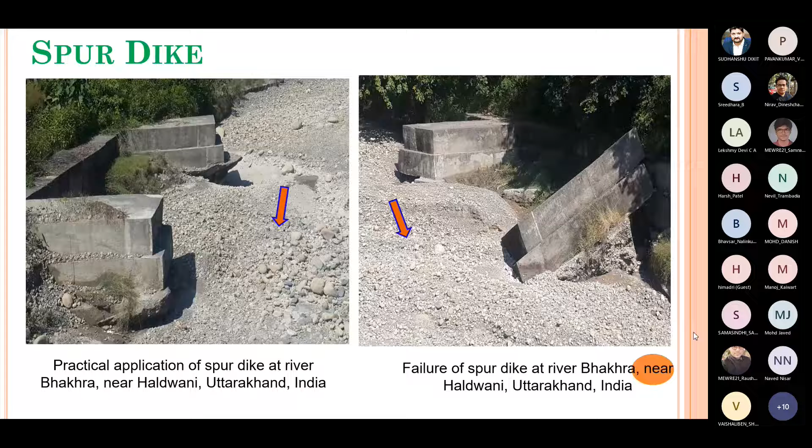Now come to the types of spur dykes. There are many types according to permeability, according to submergence, according to inclination, and some special types also used. According to permeability, there are two types: first, impermeable spur dyke, and second, permeable spur dyke.

Impermeable spur dykes are installed at the end, at the river bank. It can be built of local soil, stones, gravel, rocks, or gabions, and used to divert the flow away from the bank. But permeable spur dykes can be made from timber, bamboo, steel, or reinforced concrete piles, and allow water to pass through them at reduced velocity.

Similarly, according to submergence, there are two types of spur dykes: submerged and non-submerged. When water flows over the spur dyke, meaning the spur dyke is fully submerged in water, it is known as a submerged spur dyke. But when spur dykes are not fully submerged in water, or where water passes through any length of the spur dyke, they are known as non-submerged spur dykes.

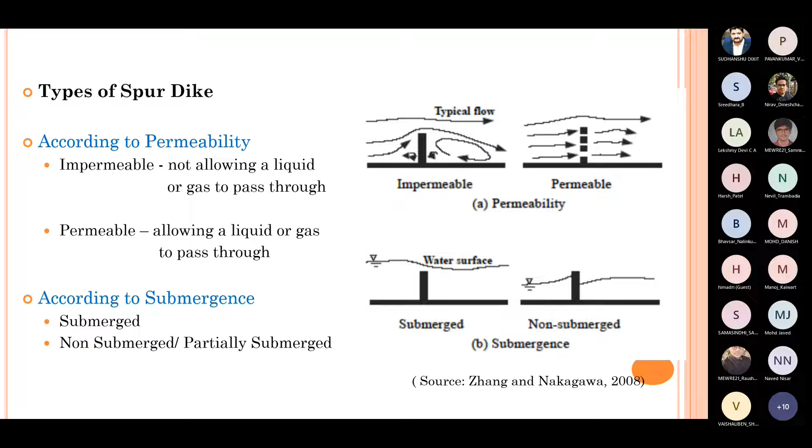According to inclination, there are three types of spur dykes: attracting, deflecting, and repelling. Attracting spur dykes point downward and attract the flow towards its head and thus to the bank. Deflecting spur dykes are simply perpendicular to the flow and divert the flow away from the bank. But repelling spur dykes incline in the upstream direction and divert the flow away from itself, so that during a flood the flow is diverted toward the middle of the river.

And according to its appearance, meaning the shape of the head of the spur dyke, there are some types: straight spur dyke, this is also an example of deflecting, mole head spur dyke, L head, T head, and hockey stick.

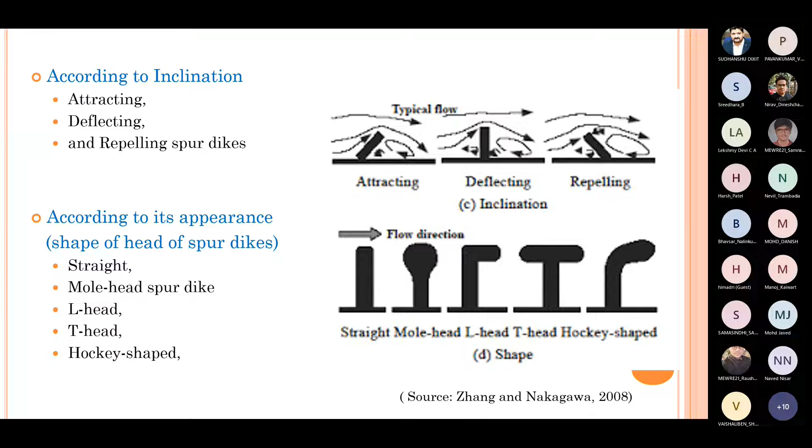Now we discuss typical flow around the abutment. Flow past the abutment is divided into three zones: main flow zone, mixing zone, and wake flow zone.

The wake flow zone is also divided into the return flow zone and reattachment zone. The main flow zone extends from the head of the abutment to the opposite side of the channel. In the main flow zone, the velocity is accelerated to near about 1.5 times the approaching flow velocity.

The mixing zone is between the main flow zone and the wake zone. The return flow zone is subdivided, and there are many small and large eddies developed within the wake flow zone. In the reattachment zone, water is reattached after the separation into the downstream of the channel.

Similarly, we have to discuss the typical flow field in a scour hole. Suppose there is an abutment at the bank of the river; water coming from upstream to downstream strikes the abutment. Some bow waves are formed, and after the strike, water goes downward.

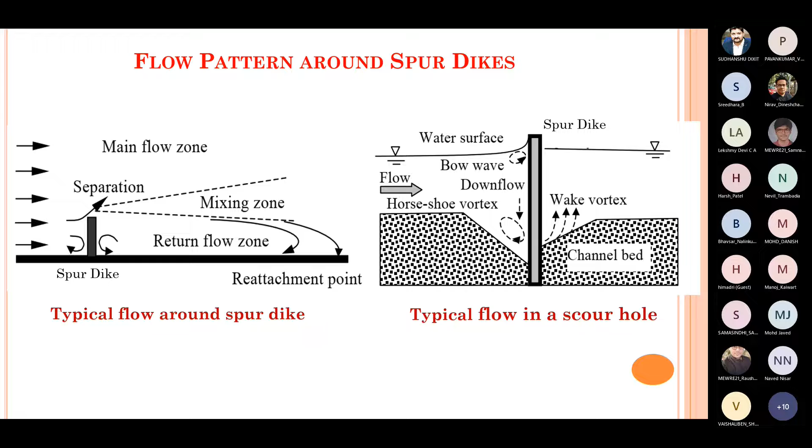Then, some turbulence characteristics of the flow will be discussed in this presentation.

We will look at what characteristics have been found and how to interpret them for analysis purposes. As shown earlier, around the abutment there is three-dimensional turbulent flow. The development of scour around the abutment is due to this type of three-dimensional flow.

Water moves in the longitudinal, transverse, and vertical directions. These complex phenomena that form the scour are poorly understood and difficult to characterize. The major turbulence characteristics are mean velocities in the longitudinal, transverse, and vertical directions.

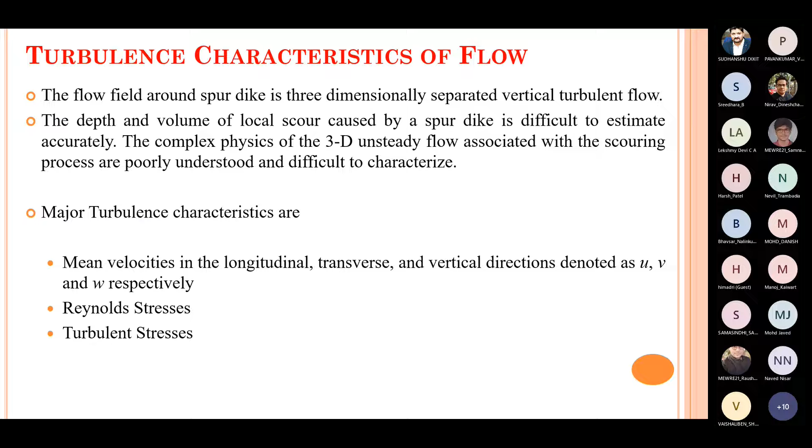We denote these as U, V, and W. Also important are the Reynolds stresses and turbulent stresses.

These are some instruments used for measurement of three-dimensional flow velocity. First, acoustic Doppler velocimetry, known as ADV. It is designed to record instantaneous velocity components at a single point with high frequency. ADV is capable of recording at near about 200 hertz frequency.

I have used a Vectrino Plus instrument that is capable of recording velocity at 200 hertz. The measurements are performed by measuring the velocity of particles in a remote sampling volume, based upon the Doppler shift effect.

The second instrument is particle tracking velocimetry, PTV. PTV is a velocimetry method or technique to measure velocity and trajectories of moving objects in fluid mechanics. These objects are neutrally buoyant particles suspended in the fluid flow.

Another instrument is particle image velocimetry, PIV, which measures the velocity of fluid as it passes an observation point that is fixed in space.

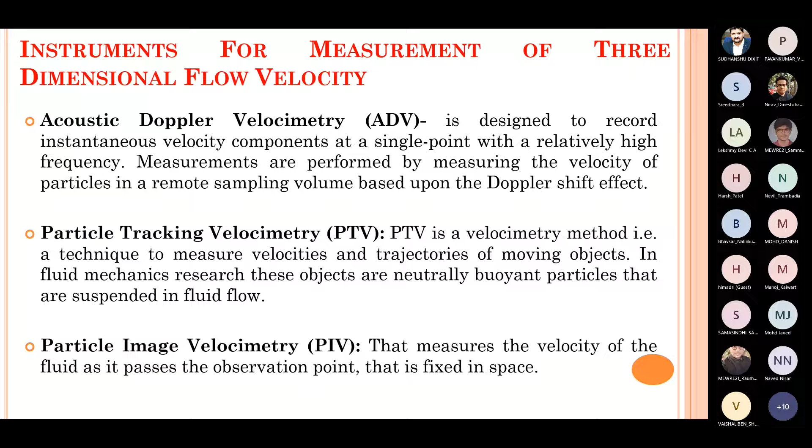So in this presentation, we have to know in detail about ADV, the Vectrino Plus instrument. The first instrument is Sontek Argonaut ADV, and the second is Vectrino Plus Micro ADV, which I have used.

The Vectrino Plus Micro ADV is a 16 megahertz instrument. This instrument measures the velocity from the transmitted transducer at 5 centimeters below the transducer, with a sampling volume of near about 9 mm.

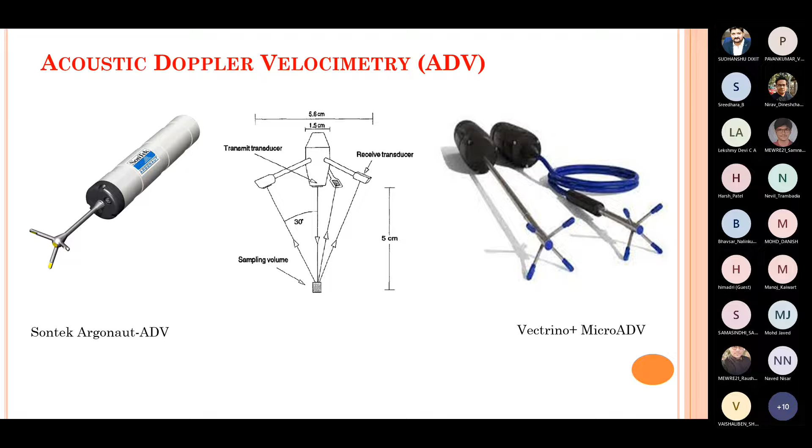Features of the 16 megahertz Micro ADV: this is a 3-axis velocity measurement sensor mounted on a 25 centimeter stem, with a high sampling rate up to 50 hertz, and a small sampling volume less than 0.1 cubic centimeter.

It has a large velocity range of 1 millimeter per second to 2.5 meters per second, excellent low flow performance, and no recalibration needed. It includes comprehensive software including Horizon ADV, with proven Sontek reliability.

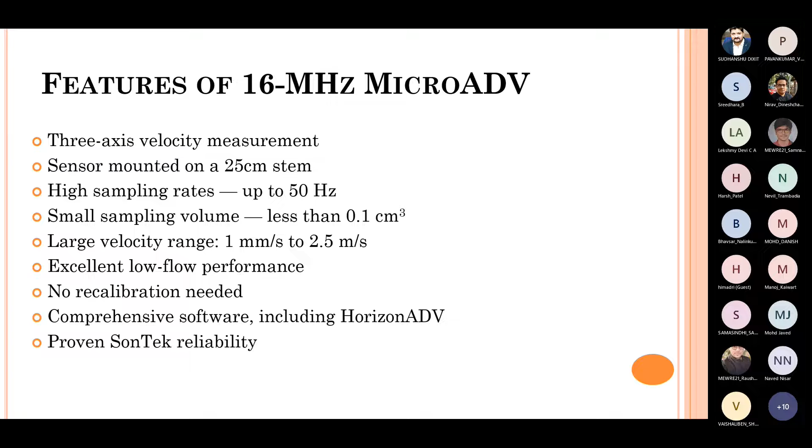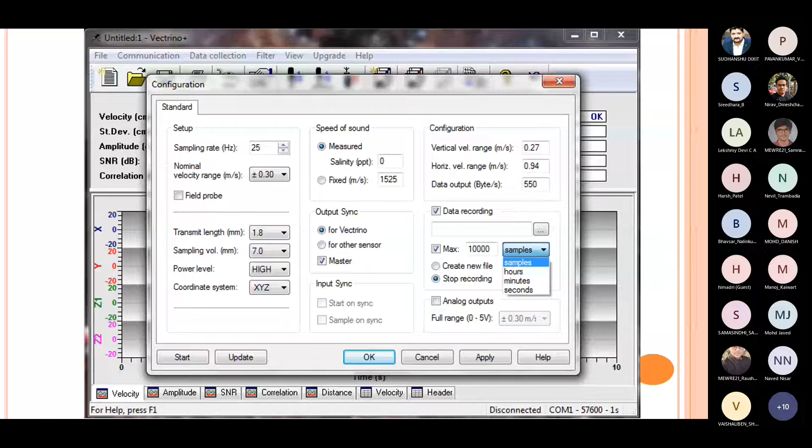After clicking OK, this is the view of the recording data: velocity, standard deviation, amplitude, SNR - SNR nearly more than 14 I think for good observation - and correlation percentage greater than 70. Then sample number and time, sample number, temperature, distance in centimeter.

Here is how you have taken readings for the experiment, at what distance you want to take the reading. This is distance in centimeter. Then status is okay. This is all about it.

This one shows the Vectrino plus a downward blue arrow - this is for directly, if you click on this, then start the run. If you want to check and set the distance, you click on the center one, Vectrino plus sign and downward blue arrow and near surface, so you check the distance, how much above or below you have to set your probe. Then upward red arrow is to stop the run.

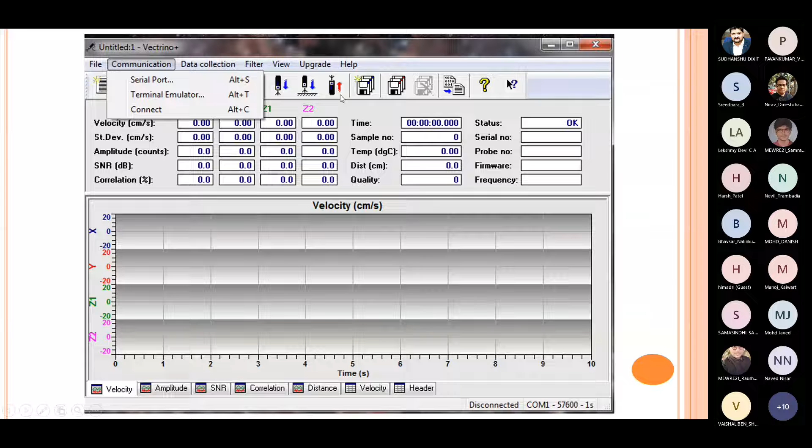This study presents the result of flow and turbulence characteristics measured by down-looking 16 MHz Vectrino plus micro ADV around partially submerged spur dike founded in clay gravel mixture. Velocity and turbulence data was collected at various cross-sections at wake and upstream of the spur dike, within and outside of the scour hole. The longitudinal velocity, turbulence intensity and stresses were measured and quantitative analysis was carried out.

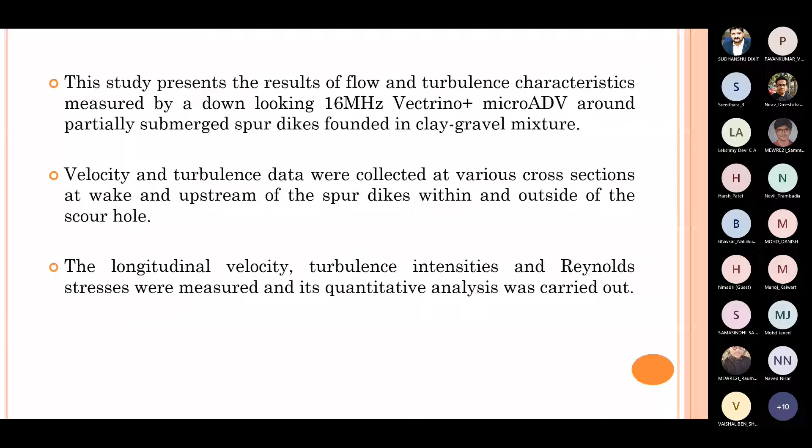So some brief review of literature about ADV. Sukhodolov in 2004 conducted a case study on turbulent flow and sediment distribution in groyne field. He used ADV at a sampling rate of 25 Hz for 100 to 300 seconds, and also used ExploreV 1.5 software developed by Nortec for processing the measured instantaneous velocities.

Similarly, Kuhnle 2008 measured and simulated flow near a submerged dike. He also used ADV, but frequency was 50 Hertz for 5-minute duration. Duan 2009 studied mean flow and turbulence around experimental spur dike, using micro ADV at sampling rate of 25 Hertz.

He measured about 1500 instantaneous velocities at each node. Then Ghodsian and Vaghefi did an experimental study on scour and flow field in scour hole around T-shaped spur dike in 90-degree bend. He used ADV Vectrino at a sampling rate of 50 Hertz for a period of 1 to 3 minutes.

Then Yaeger 2009 studied mean flow and turbulence around two series of experimental dikes. He used 16 MHz Sontek micro-ADV at a sampling rate of 25 Hertz, and used WinADV software from Sontek for post processing of data.

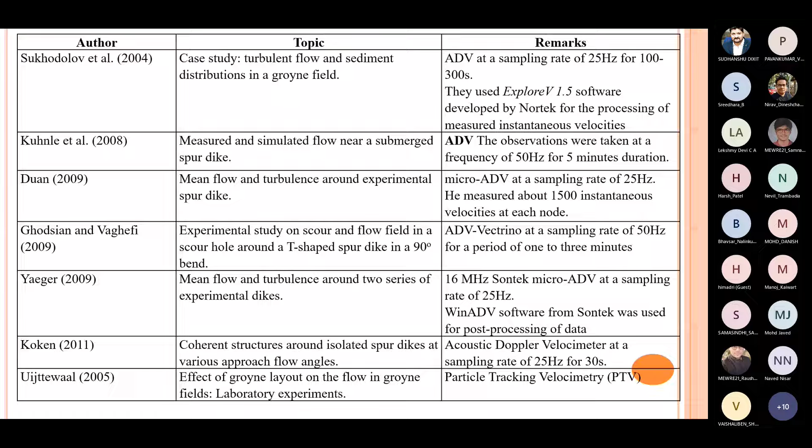So this slide shows the authors' works on ADV and how much time they recorded data at a particular node, at what frequency.

Then my experimental setup and procedure. The extensive experimental work for the present study is carried out in the Hydraulics Engineering Laboratory of Civil Engineering Department, IIT Roorkee. I have used clay, sand, and gravel - this is a photograph view of sediment used in the experiment.

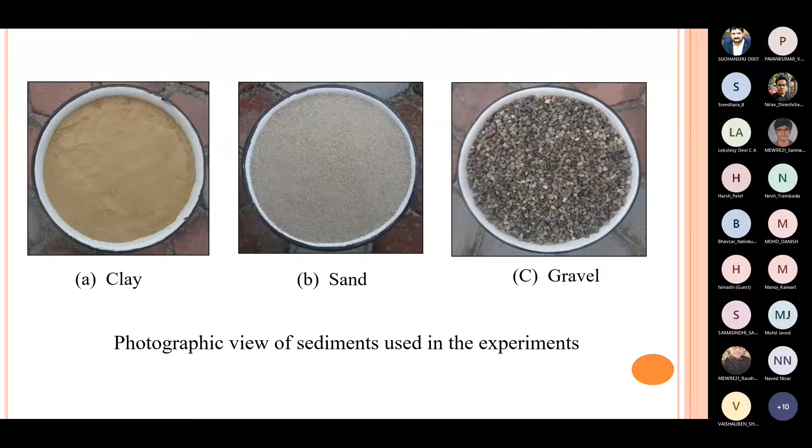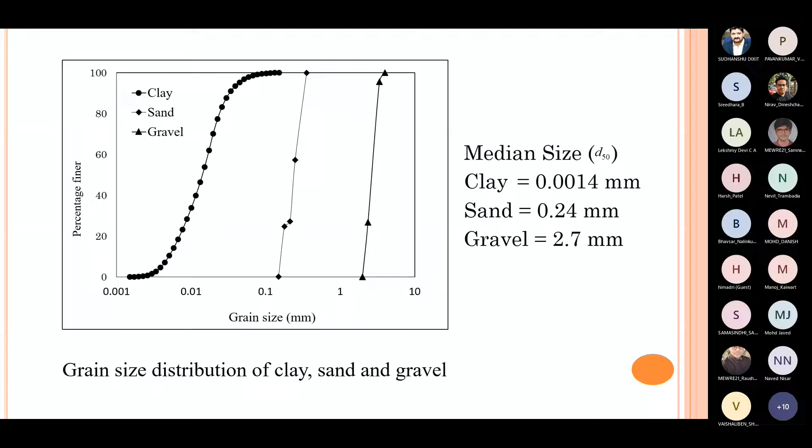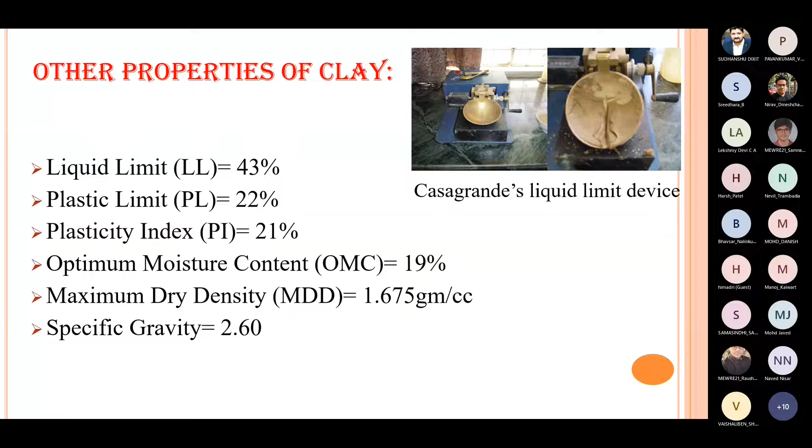The median size of clay is 0.0014 mm, sand 0.24 mm, and gravel 2.7 mm was used in the experiment. Other properties of clay were: liquid limit 43%, plastic limit 22%, plasticity index 21%, OMC 19%, maximum dry density 1.675 gram per cubic centimeter, and specific gravity about 2.60.

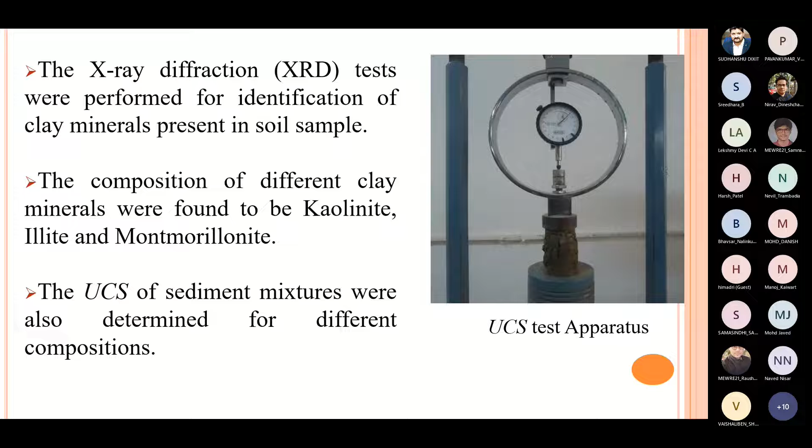Three types of spur dikes were used in the experiment, with transverse lengths of 6.1 centimeters, 8.9 centimeters, and 11.52 centimeters.

Ten types of sediment mixture were used, all taken by weight: 10% clay and 90% gravel, 20% clay, mixtures of clay and gravel, and mixtures of clay, sand, and gravel. Sand and gravel were taken in equal proportion, and clay was varied from 10 to 50%.

Flow characteristics were carried out at around 11.52 centimeters spur dike on a 30% clay and 70% gravel sediment mixture bed.

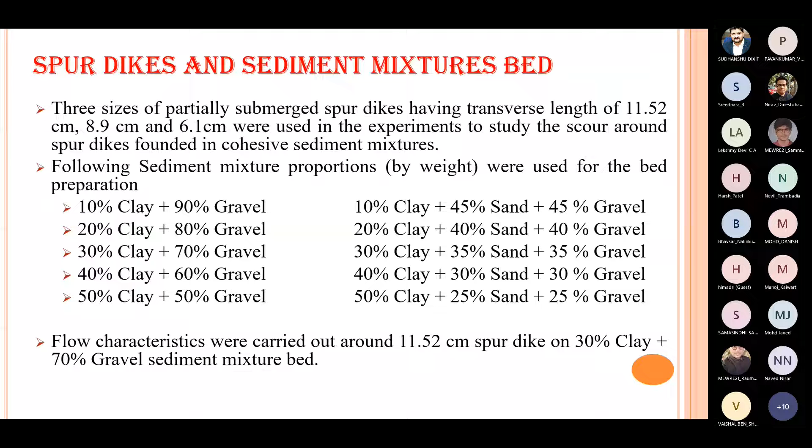This is the photographic view of the flume established in the Hydraulic Engineering Department, IIT Roorkee. The total length of the flume was 25 meters, width was 1 meter, depth was 0.3 meter, and the slope of the flume was 0.003. The working section where the spur dike was installed had a length of 4 meters, width 1 meter, depth 0.6 meter, and bed thickness of 0.3 meter. So the normal depth of the flume was 0.3 meter, and the working section beyond this was 30 centimeters deeper, totaling 0.6 meter.

For flow velocity and discharge measurement: flow velocity was measured by a pitot tube 1 meter before the spur dike, and a sharp-crested weir, installed at the end of the flume, was used for discharge measurement.

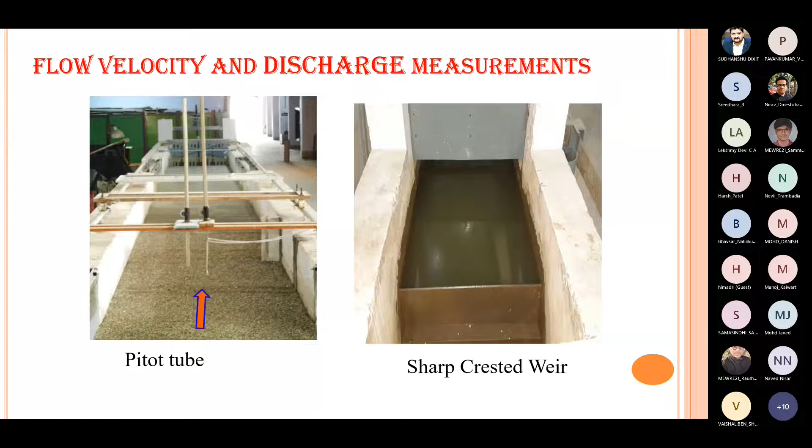This is the procedure for bed preparation: mixing of sediment and compaction. First, equally weighted mixture, meaning 10% clay and 90% gravel, or any other proportion, was taken. We mixed the clay and gravel thoroughly, then added water into the mixture and left it for 24 hours. Due to this, the moisture content is homogenized within the whole mixture.

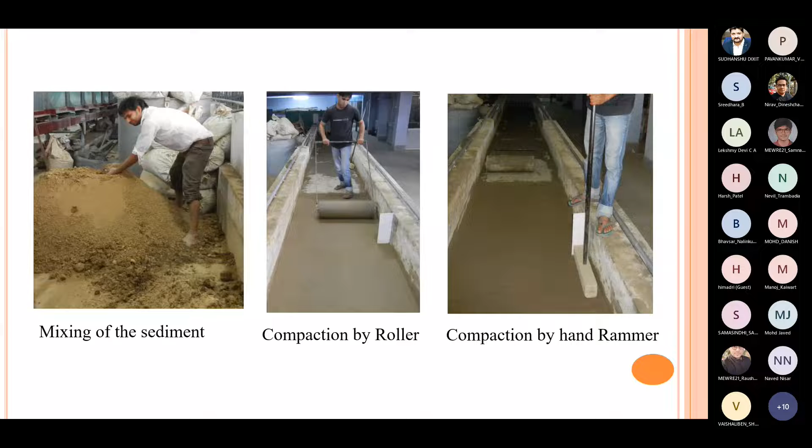After preparation of the sediment mixture, the test section was filled with the prepared mixture after installation of the spur dike at a predetermined location in the groove of the test section. The test section started at 12 meters downstream of the flume entrance, and the spur dike with transverse length of 11.52 centimeters was installed at 14 meters downstream of the flume entrance.

The filled sediment mixture was compacted in 3 layers of approximately 10 centimeter thickness by dynamic compaction method, achieved with the help of a cylindrical roller. The area near the sides of the channel and the spur dike was compacted using a wooden hand hammer with dimensions of 40 centimeter length, 10 centimeter width, and 7 centimeter thickness, to provide bonding between layers. Each layer was near 10 centimeters.

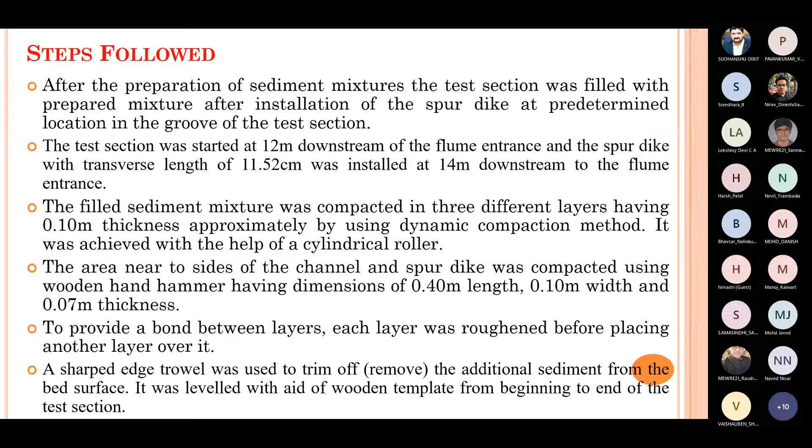After filling each 10 centimeter layer, it was roughened before placing another layer over it to provide strength between the layers. A sharp-edged trowel was used to remove additional sediment from the bed surface, and it was leveled with a wooden template from beginning to end of the test section. The sediment mixture was then filled into the test section up to the general flume level, with final thickness in the test section kept up to 30 centimeters.

After preparation of the experimental setup, the run was started to observe temporal variation around the spur dike. The depth of approaching flow was measured at 1 meter before the spur dike. Once the equilibrium condition was achieved, the flow was stopped and the bed was allowed sufficient time to drain out the water.

The dried scour hole was fixed by spraying resin, an instant adhesive, over it and left for drying. Now our setup is ready for the 3D velocity experiment. Flow was again started in the flume very slowly up to a predetermined level, and after stabilization of flow depth, the 3D velocity run was started.

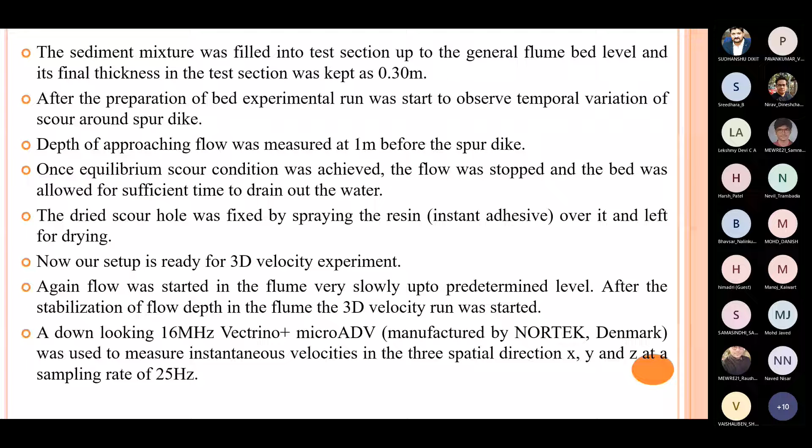A down-looking 16 MHz Vectrino Plus micro ADV, manufactured by Nortek, was used to measure instantaneous velocity in three dimensions, x, y, z, at a sampling rate of 25 Hz. This is the setup where the Vectrino Plus micro ADV probe was fixed on the ruler bar of the pointer gauge.

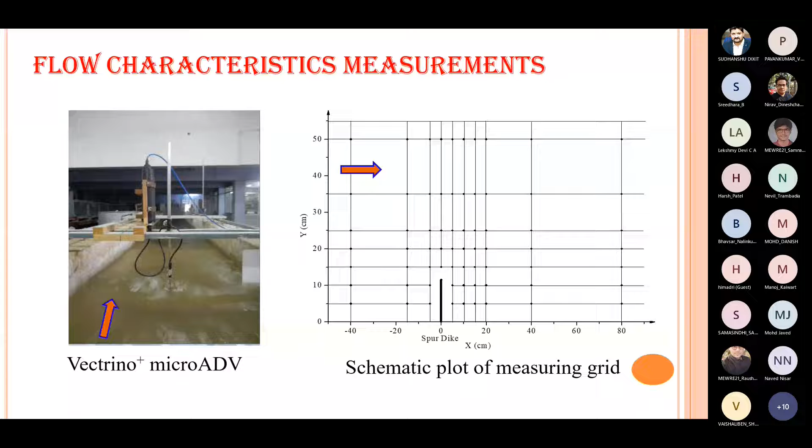The lowest point of measurement was 5 mm above the channel bed, up to 2 centimeters from the bed. The measurement was made at 5 mm intervals near the bed, while the interval was kept at 1 centimeter at higher elevations; up to 2 centimeters, measurements were taken at 5 mm intervals. The data collected from the ADV had a file extension of .vno.

Using the Vectrino Plus software, the VNO file was converted into a .adv file readable by WinADV software, and then WinADV software was used for the post-processing of captured data.

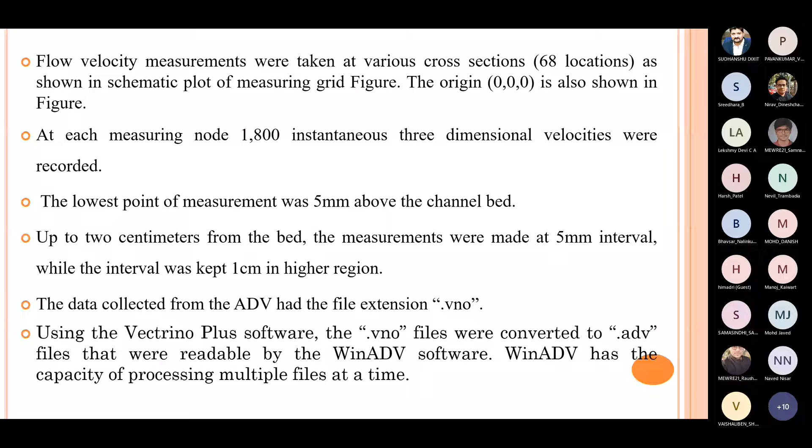For the conversion, we have to add the file. Then in data conversion, there is some setting where we select NDV. When we select NDV, the file is converted into .adv extension.

After conversion, the raw data was filtered using WinADV software by the phase space thresholding method given by Goring and Nikora in 2002, and communication errors were filtered out. The measured velocity in the processed data file was used to calculate turbulence characteristics: mean velocity, Reynolds stresses, and turbulent intensities.

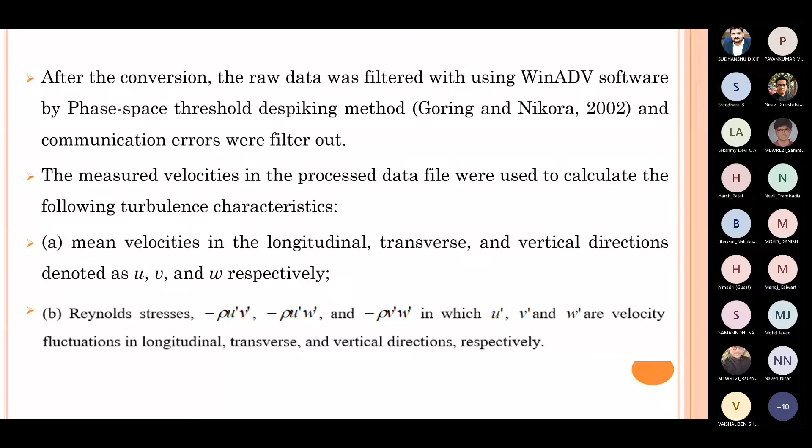Then the discussion of results and discussion.

Stream velocity in the longitudinal direction of the flow field was measured from the spur dike at upstream locations 5, 10, 15, and 40 centimeters, and at downstream locations 5, 10, 15, 20, 40, and 80 centimeters. Total 68 nodes were decided for the velocity measurement. The spur dike was installed at location 0, with negative and positive signs representing the upstream and downstream sides of the spur dike.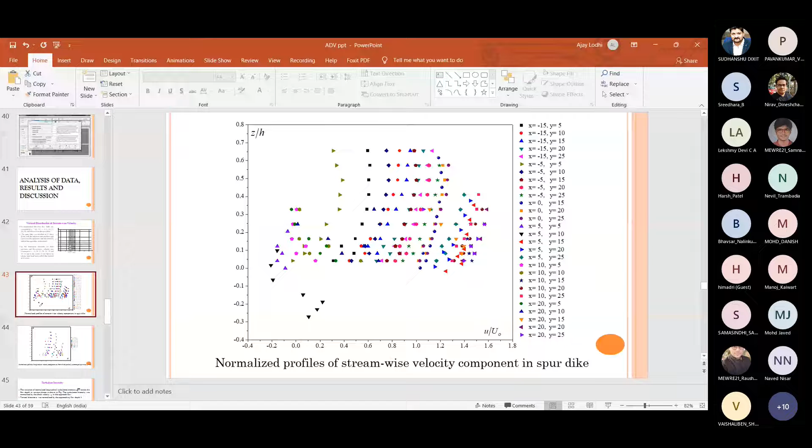Here, the negative Z value shows the scour hole depth, and positive Z value shows the depth of water above the surface. H is the approaching flow depth. Small u is the longitudinal velocity and u0 is the approaching flow velocity.

So in this diagram, we have seen at y equal to 15, meaning the flow velocity just in front of the spur dike from the left hand side bank, 15 centimeters, which is just 11.5 centimeters from our spur dike, 3.5 centimeters away from the tip of the spur dike.

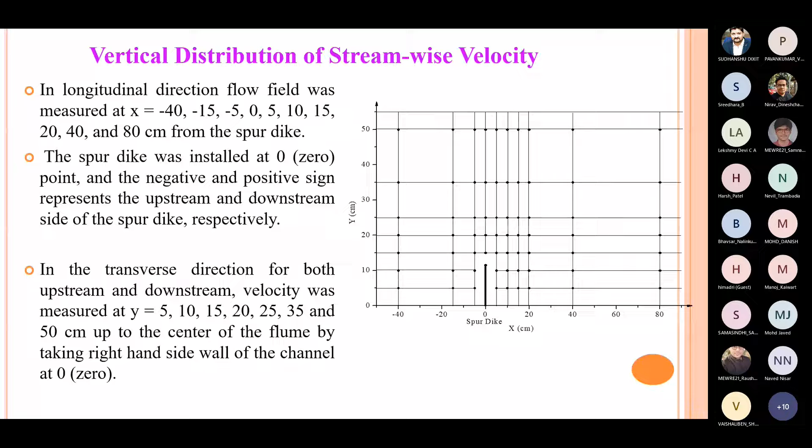The maximum velocity was achieved at the front of the spur dike, near about 1.2 to 1.45 times the approaching flow velocity. At 20 centimeters it was a little less, and at 25 centimeters it was also less. But just in front of the spur dike, the maximum velocity was near about 1.2 to 1.45 times the approaching flow velocity.

But you have seen in the scour hole that some points are below zero, near about 6-7 points were recorded. The velocity is low at the scour hole.

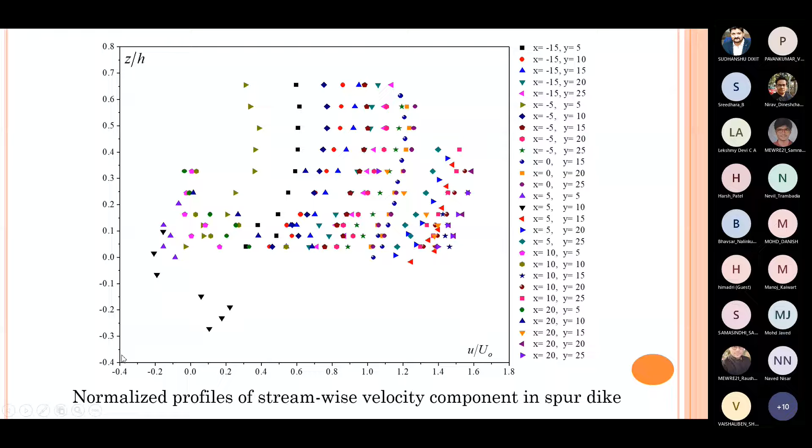Then if we have to see the front of the spur dike at y equal to 15, this is the velocity profile at x equal to 0, 5, 10, 20, 80, and -5, -15, and 40. In this figure, we also see the maximum velocity was at x equal to 5 and x equal to 10, which is positive. Just behind the spur dike, the maximum velocity was achieved at the 15 centimeter transverse length.

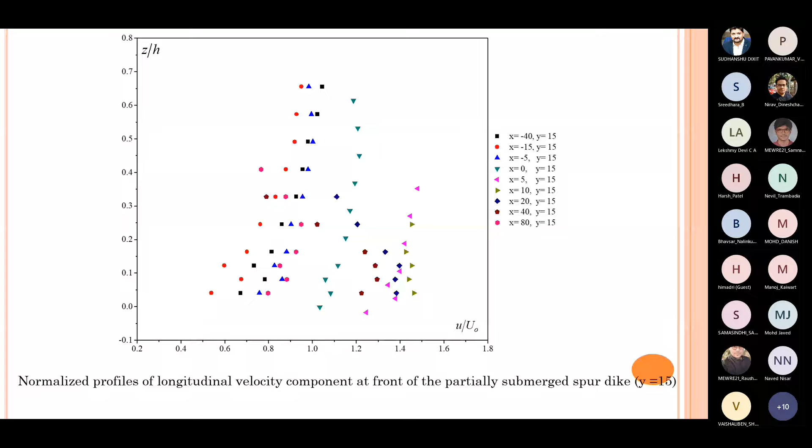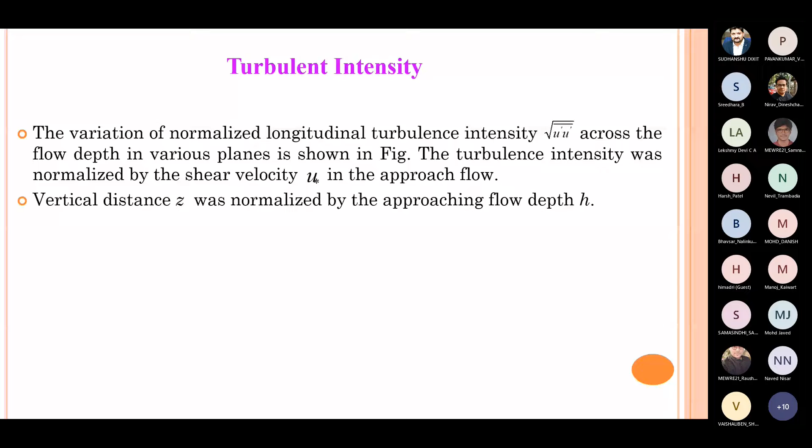Then the variation of normalized longitudinal turbulence intensity, square root of average of u prime u prime, across the flow depth in various planes is shown in the figure. The turbulence intensity was normalized by shear velocity u star in the approaching flow, and z was normalized by approaching flow depth, z by h. The longitudinal turbulent intensity, square root of u prime, is normalized by approaching shear velocity.

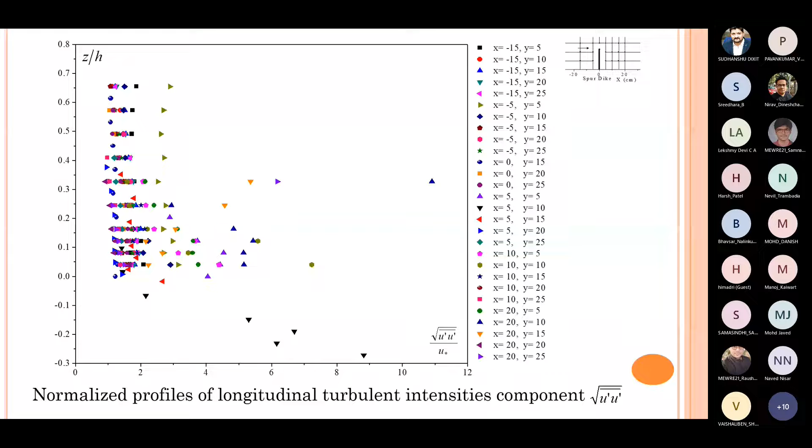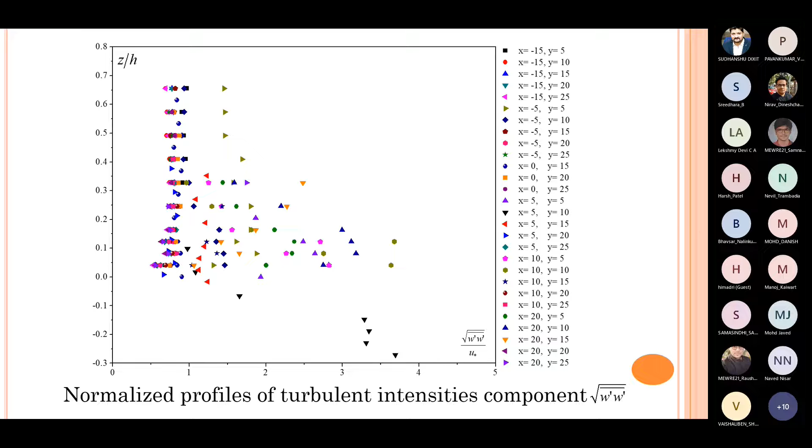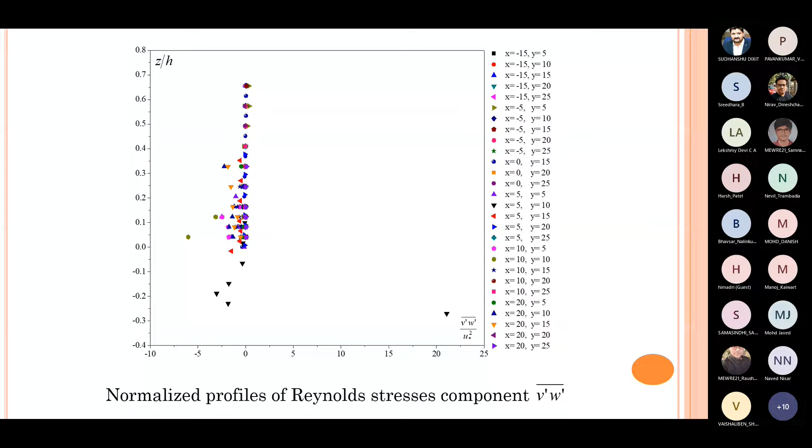Then the turbulent kinetic energy, that is half of U prime bar plus V prime bar plus W prime bar, TKE turbulent kinetic energy, is also 20 to 25 to 45 times of the approaching flow shear velocity. So this also contributes to the formation of scour hole.

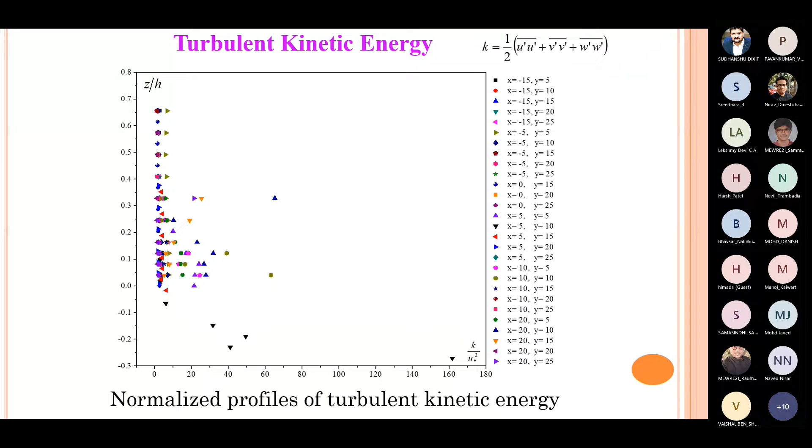Then the quadrant analysis was also carried out to know the contribution of bursting events in the formation of scour.

To carry out the quadrant analysis, the longitudinal fluctuation U minus U bar, and the vertical fluctuation velocity W prime, that is W minus W bar, was decomposed using their sign by WinADV software developed by Nortek in 2000.

The data filtration was carried out by phase-space threshold method included in the WinADV software, and this filtered data was used in further analysis. A code was developed in Fortran 90 to obtain the contribution of outward interaction, ejection, and inward interaction, sweep events of the whole data for the particular z by h value.

This code was also described earlier by Dr. Janser in his presentation.

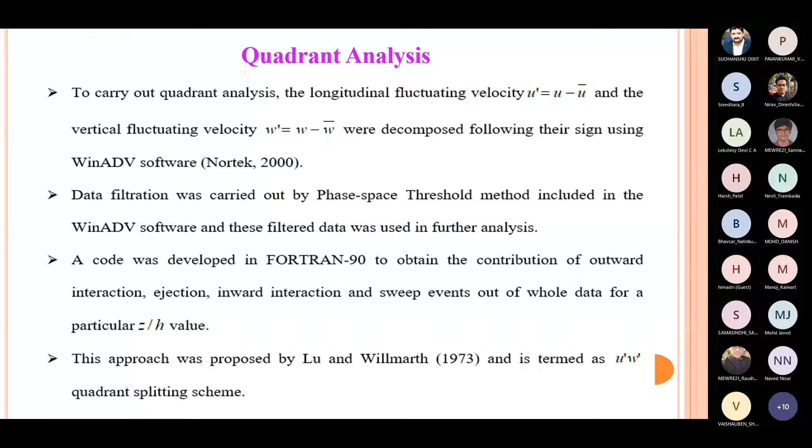This approach was proposed by Lu and Willmarth in 1973 and is termed the U prime W prime quadrant splitting scheme. In the present study, the quadrant technique has been used to identify bursting events in the flow within the scour profile around the spur dike. The interaction between the turbulent burst and sediment motion can be determined by quadrant analysis, as per Cava et al. 2005, Storm and Papanicolaou 2007.

So turbulence was divided into 4 quadrants: outward interaction, in which U prime is greater than 0 and W prime is greater than 0, that is quadrant 1. Ejection, quadrant 2, in this U prime is less than 0 and W prime is greater than 0. Then inward interaction, quadrant 3, U prime is less than 0, W prime is less than 0. Sweep falls in quadrant 4, U prime is greater than 0 and W prime is less than 0.

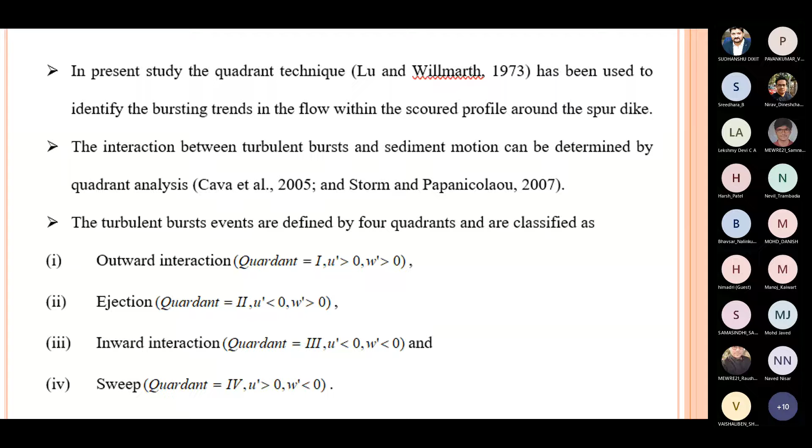So this is the distribution of quadrants based on U prime and W prime. In simple terms, it is possible to spot an ejection event if low velocity fluid, U prime less than 0, and upward velocity, W prime greater than 0, are observed to occur simultaneously. Similarly, sweep events can be identified by observing a high velocity fluid moving toward the bed, U prime greater than 0 and W prime less than 0, meaning W prime has the downward direction.

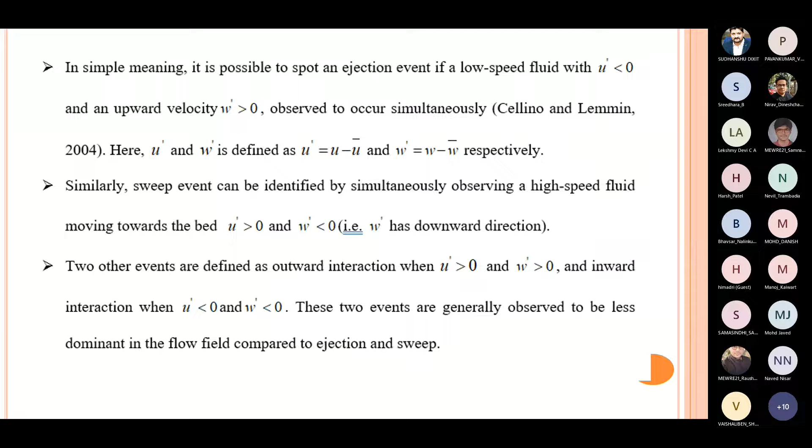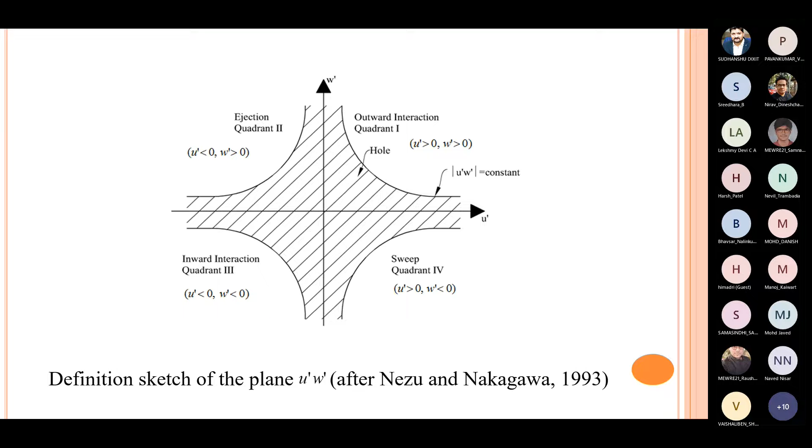Two other events are defined as outward interaction when U prime greater than 0 and W prime greater than 0, and inward interaction when U prime less than 0 and W prime less than 0. These two events are generally observed to be less dominant in the flow field compared to ejection and sweep. This is the definition sketch of the U prime W prime quadrants, all 4 quadrants, given by Nezu and Nakagawa in 1993. Here the center of these quadrants represents the hole.

And this is the bursting events around partially submerged dike. In the first figure, at x equal to -5, meaning just upstream of the spur dike, we have seen ejection and sweep events participate more than outward and inward interaction.

Second diagram shows the distribution of velocity after the spur dike, at downstream of the spur dike, 5 centimeter from the spur dike. In this figure we have seen overall outward and inward, ejection and sweep events participate more.

But within the scour hole, in my case, generally in all cases ejection and sweep participate more. But in this case, because these experiments were taken in the cohesive sediment mixture, scour hole was very small, so outward and inward interaction participate more.

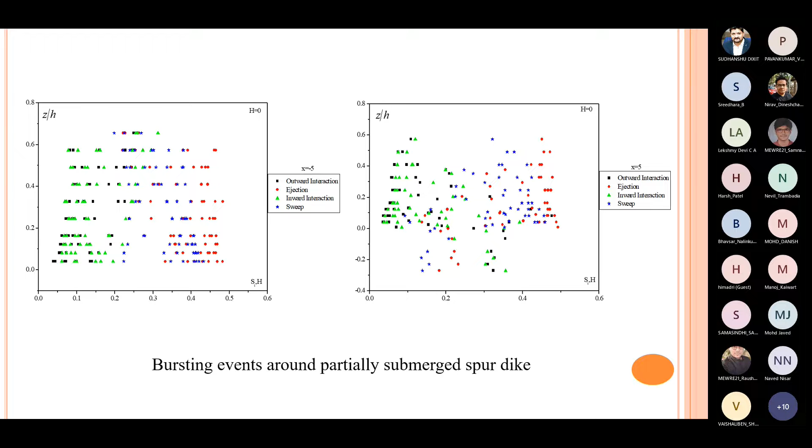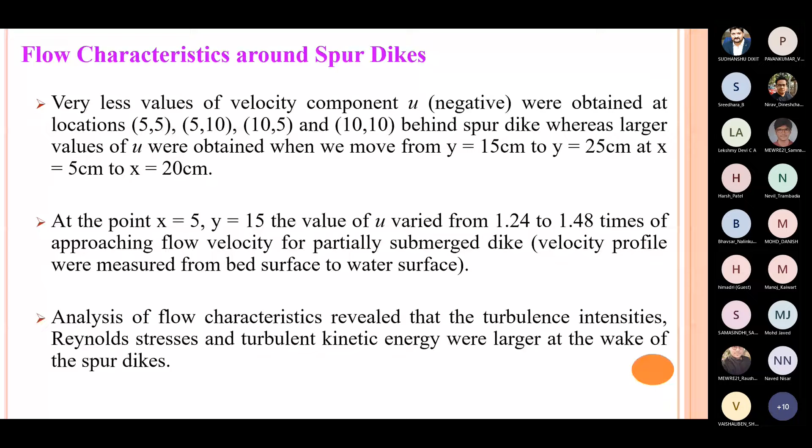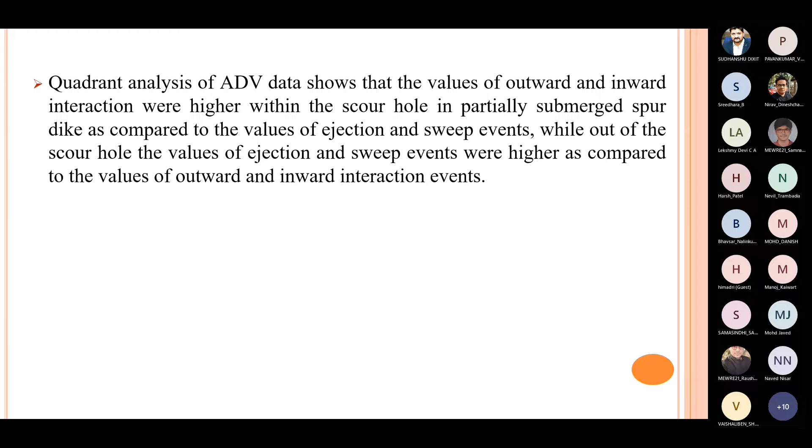Quadrant analysis of ADV data shows the value of outward and inward interaction were higher within the scour hole in partially submerged dike as compared to the value of ejection and sweep events, while outside the scour hole, the value of ejection and sweep events were higher as compared to the value of outward and inward interaction events.

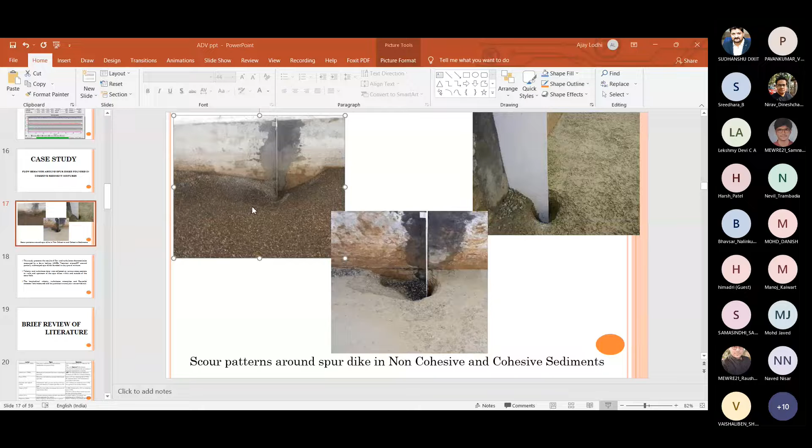First figure, this one is. First figure shows the non-cohesive sediment, scour around the cohesionless sediment. And second and third picture shows the scour in a cohesive sediment.

So Lakshman, to answer your query, the first picture is belonging to sand and gravel mixture, which was mixed in some proportion, and spur dike was placed and scour took place. And you can see the deposition on the downstream side of the spur dike.

The second photograph is of clay sand gravel mixture, where clay is mixed in various proportion. You can see very less deposition on the downstream of this spur dike, wherein the third or middle photograph you can see clay has been washed out, and whatever gravel and sand mixture is there, you can see it deposited even in the scour hole and a little bit outside of the scour hole.

I hope this will solve your query, or still... Is it okay, or anything? Sir, partially solved the query, because I was asking about the test section.

Which section? Sir, the test section, or the spur he has taken in the test section. Okay, test section. Dr. Raja, do you have the full photograph showing spur dike and channel?

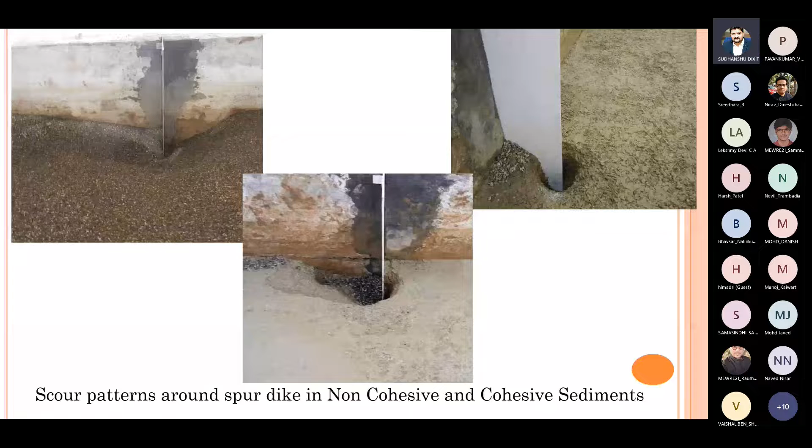Can you show that photograph? One minute, sir, he's asking for the flume photograph, the whole flume cross section photograph, showing spur dike as well as the test section.

Lakshman, now you can raise your query. What exactly do you want to know?

Deposition is always either on the rear side of the pier, or the wake side of the spur dike or pier, or in some cases on the inner side of the pier as well. Is it all right, Lakshman? Okay sir, okay.

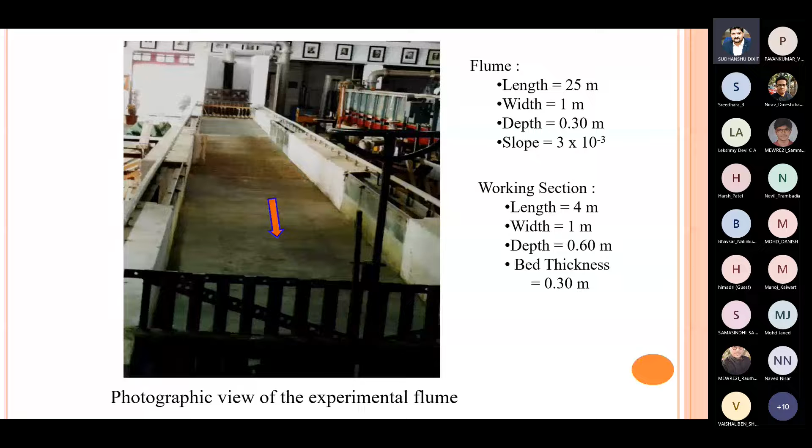Sudhanshu, there is one question written in the chat box. Yes, you can read it out. The question is, can I normalize the turbulent intensity with the inlet velocity, the approaching velocity?

Yes. Normalize the turbulent intensity with the inlet velocity. So Indulekha is asking, can I normalize the turbulent intensity with that inlet velocity? Actually we are doing that in the formula itself. The U dash term in the formula for turbulent intensity, we are dividing it by U bar.

That I think is what ma'am is asking about the formula of turbulent intensity. Dr. Indulekha, are you there?

Yes sir. Is it the usual practice to normalize with the shear velocity, or can I normalize it with the approaching flow velocity?

Since turbulence intensity or turbulence characteristics are very close to shear stress and shear characteristics, it is general practice to normalize Reynolds stress or turbulence intensity using shear velocity. Otherwise, as a non-dimensional parameter, it is not 100% necessary. You can even normalize it with either the average velocity of the flow or the inlet velocity, as you have written. The idea is to make it non-dimensional.

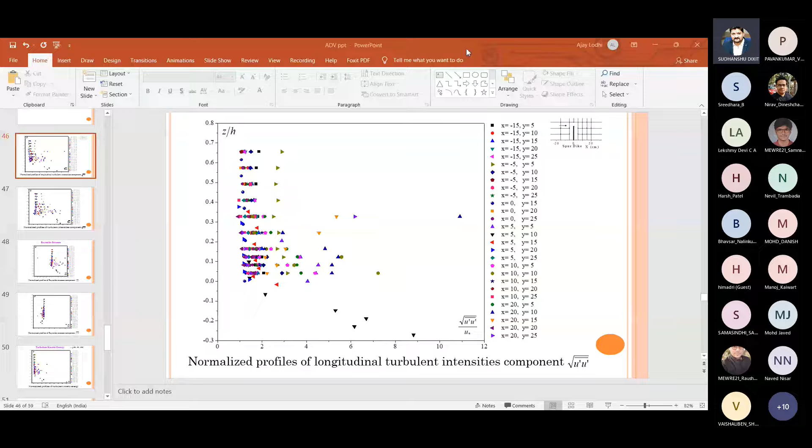Any other question? Any other question?

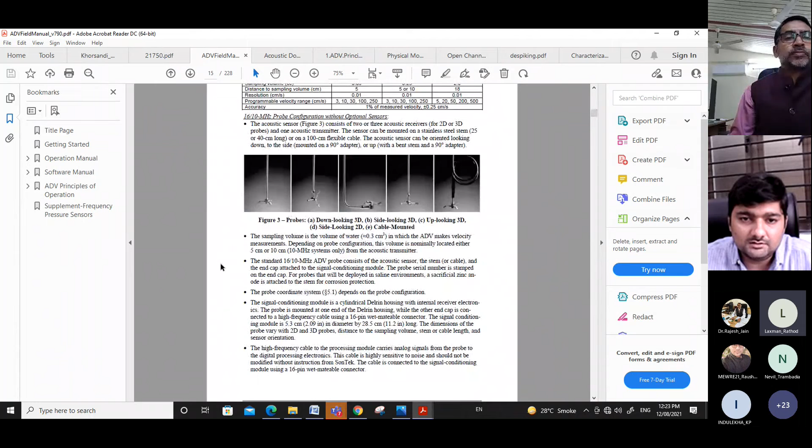All participants are instructed to be on time at 1:30 p.m. We have a break now. I have also shared the PDFs of the ADV field Hydra manual. In this manual you will get all the details of ADV - different geometry: down-looking, side-looking, up-looking, and 3D measurements - everything for different applications. All the details are there.

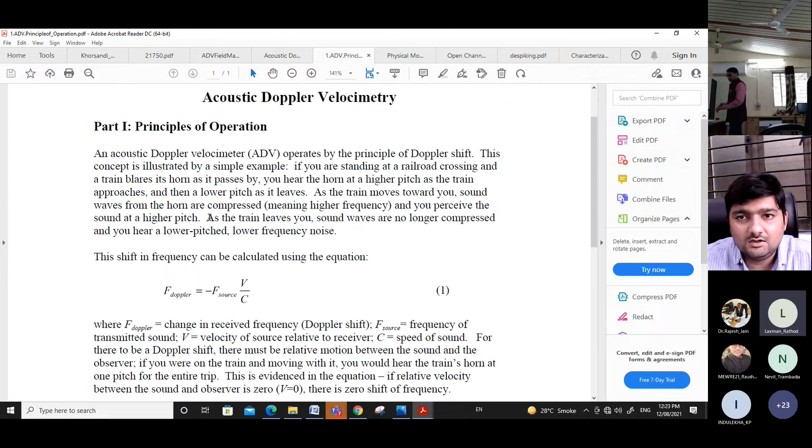Then there are some principles manuals, and one more - this is a very good paper on the stochastic nature of flow turbulence that I have shared. And this is one on de-spiking acoustic Doppler velocimeter data, by Goring and Nikora - that algorithm paper. I shared this yesterday too. I think I have shared two of my papers - one related to characterization of flow turbulence in a mobile boundary channel, and one related to stochastic nature of flow.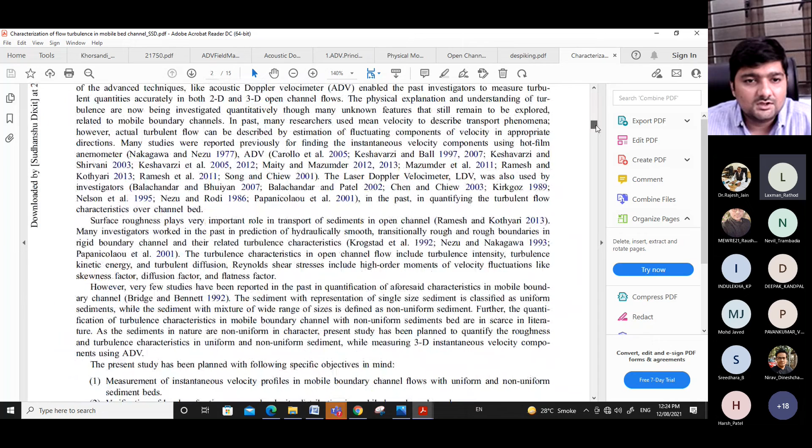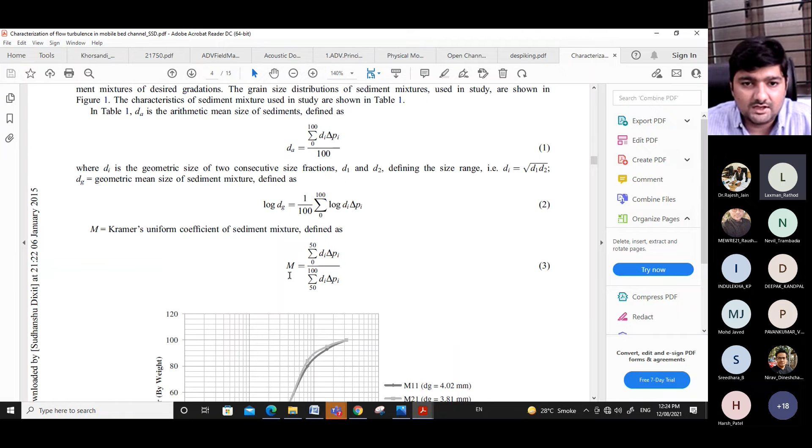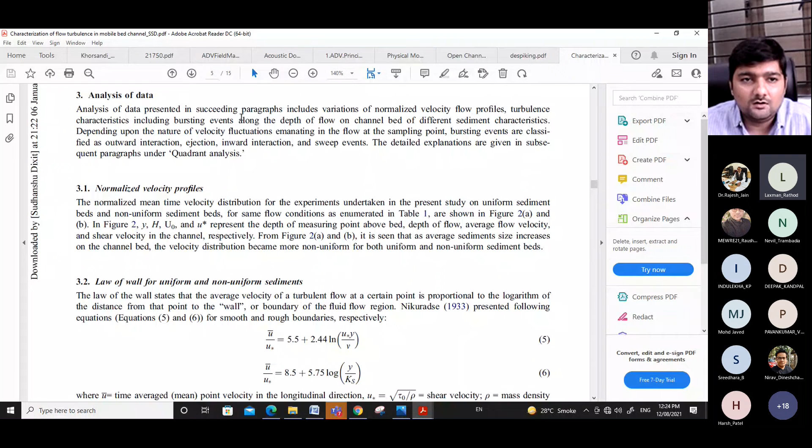If you read these papers, you will definitely get an idea of how you can perform your experiments, how you can prepare your sediments, what the characteristics are, what the important parameters are like M, d_a. You can prepare your data tables, have a nice experimental procedure, analyze the data, and check the important relations - like normalization of velocity with depth.

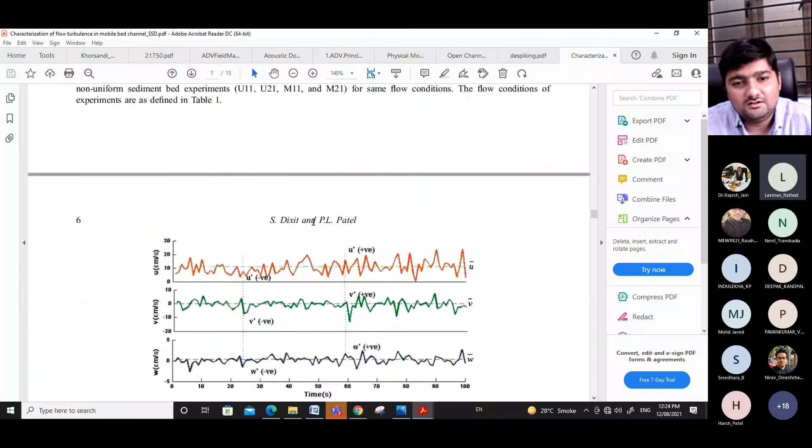These are the different fluctuating components you have already seen. You can take advantage of these papers, and if you require any other paper related to ADV, I can share that too. I have more than 400-500 papers with me, so if you are interested or have any doubt at any time, you can contact our team.

We are ready to help you in this domain, and we want you to take maximum advantage of this FDP and take this opportunity to work in this field and do a lot in it. Thank you all.

Thank you, sir. Thank you so much. Thank you, sir.